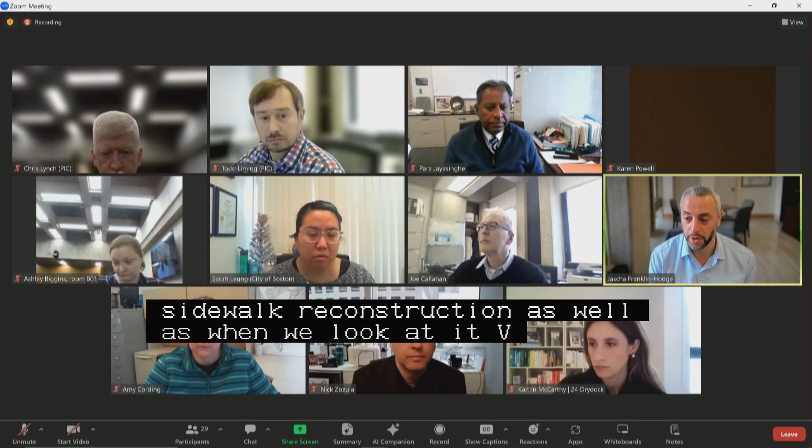So moved. On to public hearing continued number 2 on a petition by Atlantic Oliver Mass LLC for the making of specific repairs within the following public ways in Roxbury, consisting of curb realignment, sidewalk reconstruction, as well as new and relocated pedestrian ramps, street lighting infrastructure, landscaping, and driveway curb cuts. Massachusetts Avenue on its southwesterly side at address numbers 903 to 909, generally southeast of Island Street west of Massachusetts Avenue. New business on January 11th, public hearing on January 25th, as shown on a plan entitled City of Boston Public Works Department Engineering Division Specific Repair Plan, 909 Massachusetts Avenue and Island Street, Boston, Roxbury, one sheet dated January 17th, 2022, revised November 11th, 2023.

Would the petitioners please reintroduce themselves and let us know how you'd like to proceed on this action as well. Again, good morning, Mr. Chair, members of the commission, Attorney Nick Zozula, McDermott, Quilty, Miller and Hanley, 28 State Street in Boston, here on behalf of Atlantic Oliver Mass LLC, the petitioner. As for the first matter, we'd also like to request a continuance here until February 29th.

Do I hear a motion to continue public hearing continued number 2? I'll make a motion to continue public hearing continued number 2 as read into the record by the chair till February 29th. Second. All in favor? Aye. Aye. Any opposed or abstain?

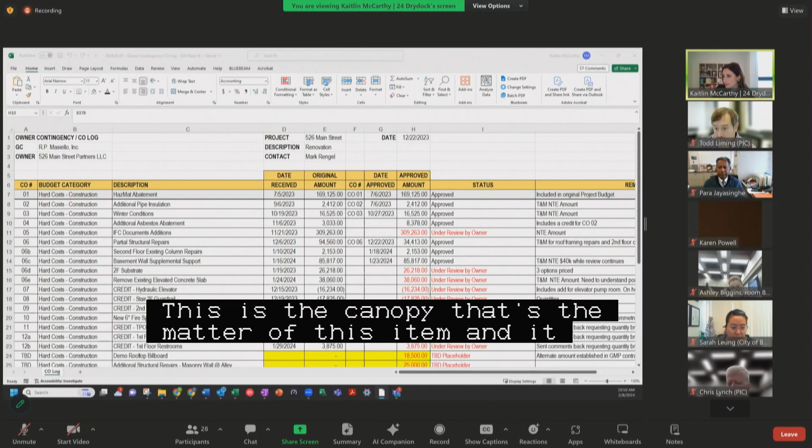And we have designed it in accordance with typical PIC regulations, which is that there's a 15-foot minimum vertical clearance, and it will extend 4.5 feet onto the sidewalk. Caitlin, apologies for interrupting, but we're seeing a spreadsheet on your screen, we're not seeing the plan rendering.

Thank you for flagging, sure. Is this the correct screen? There we go, that's a rendering. Perfect, thank you so much.

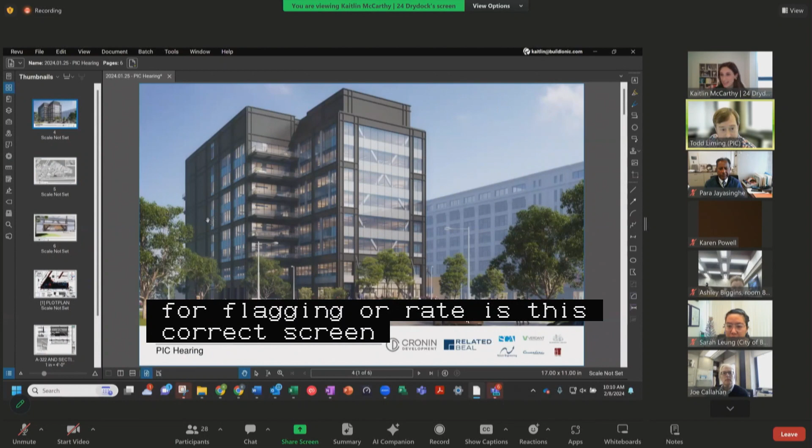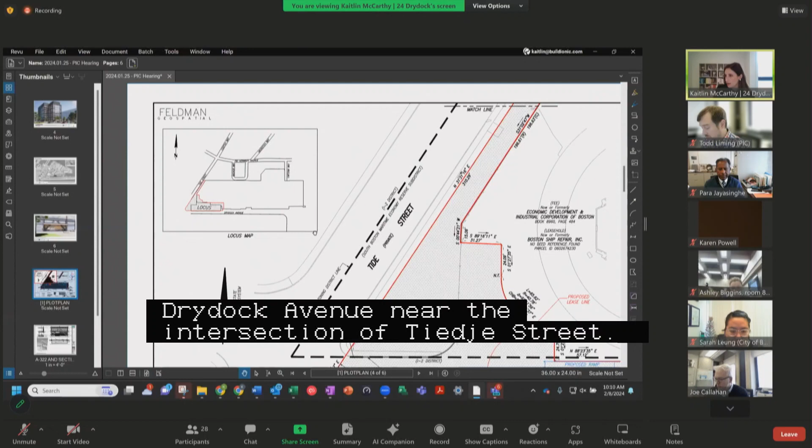So as I mentioned, 24 Drydock, this is going to be a 237,000 square foot life science building in the Ray L. Flynn Marine Park. It's right along Drydock Avenue near the intersection of Tide Street. The canopy that we're talking about today is this canopy that overhangs the sidewalk. As I mentioned, there's a minimum vertical clearance of 15 feet and a projection of 4.5 feet. There are also snow and ice mitigations built in to ensure that rain and snow are properly drained.

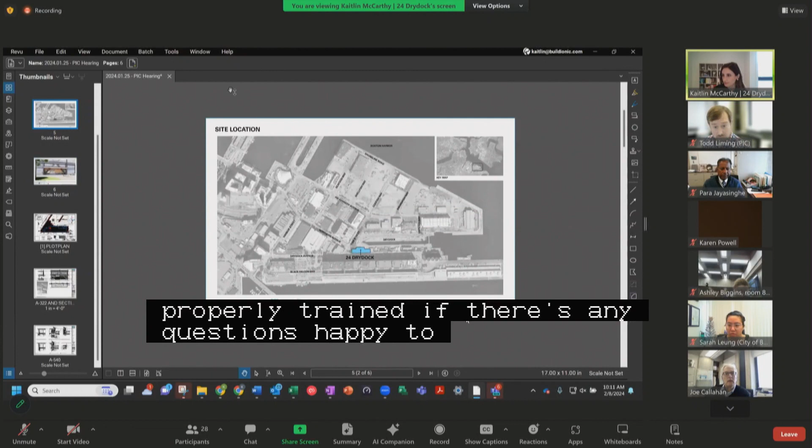If there's any questions, happy to answer them, but otherwise I'll turn that over back to the chair. Thank you very much for that. I guess my first question is, I know there was some discussion the last two times about the kind of review of any specific repairs, understanding that this is going to be turned over to the city at some point in the street. What was the conclusion of that discussion?

Mr. Chair, Matt Donovan from the Boston Planning and Development Agency. When you say specific repairs, do you mean the future improvements that are going to accompany the ground-up development at the site? Correct, yes, sorry, I was not very clear in that statement. Understanding that there will be additional changes to this street, which, were this to currently be a public way, would be under the purview of PIC, we had talked about making sure that those changes got some kind of review by the commission in anticipation of the street handover, and wanted to confirm if we had arrived at a conclusion about how that would happen and if everyone was in agreement on that.

Yes, I believe we are. I shared language with Todd. The proponent and I still have to work on the language and how it's going to read exactly, but conceptually I think we're all in agreement that before the issuance of an initial building permit, this same process will come through with whatever the improvement is. There are other examples that I'm sure will be forthcoming from other projects, and this is going to be the standard that we use for everything, so whether it was a projection license or streetscape improvements, it's going to be the same process. That language is going to live in the cooperation agreement so that we can monitor it through the project's development for this one, but similar language would go in depending on what the agreement were to be.

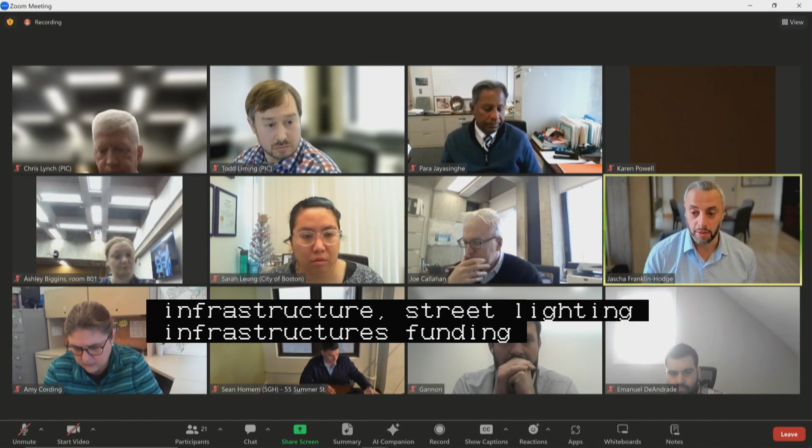Summer Street at address number 55, generally southeast of Chauncey Street, generally southwest of Summer Street, Kingston Street on its northwesterly side, generally between Summer Street and Bedford Street. New business on January 25th, as shown on a set of plans entitled City of Boston Public Works Department Engineering Division Specific Repair Plan, 55 Summer Street, Kingston Street, Summer Street, Chauncey Street, Boston, 5 sheets dated February 6, 2024.

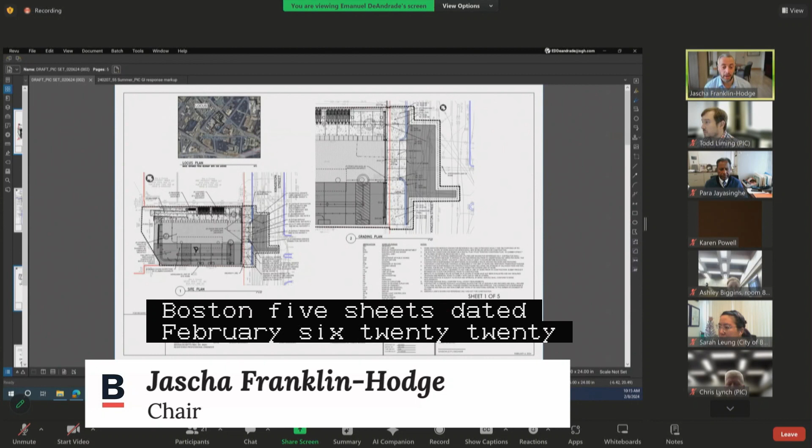Petitioners, please introduce themselves, their affiliations, give us a brief reintroduction to the project, and then walk us through anything that has changed since your last hearing. Great, thank you. Thank you for the time.

Sean Homem with Simpson, Gumpertz and Heger, engineer on the job. We also have Emanuel DeAndrade, who will be driving the screen today, also from SGH, and Gannon DePetris from Phase 3. Again, thank you for your time in reviewing this submission.

First off, I'll start by saying we had a series of several productive meetings with many folks that are on the call today. Just want to thank you all for your valuable input, feedback, and the cooperation with trying to work to achieve this goal here.

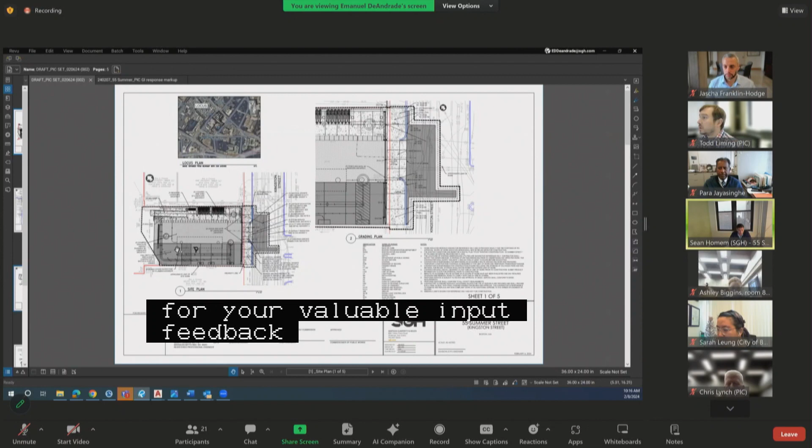This 55 Summer Street project is the general work is an interior renovation to convert the existing office building at 55 Summer Street to a mixed office and research development facility. As part of this, there was specific plaza and sidewalks on plazas on Chauncey and Summer Street and sidewalk on Kingston Street.

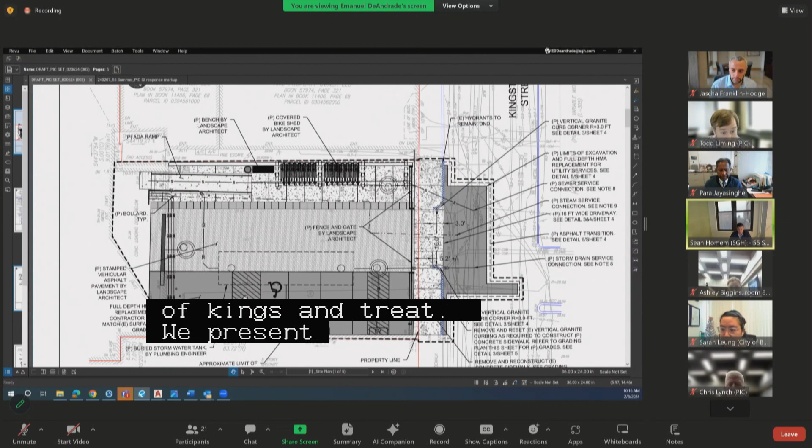We presented our scope during the last meeting, had several comments that I'll walk through the comments and then the proposed solutions that we arrived at in the last 2 weeks.

First off, we'll start on Kingston Street. This is the loading dock entrance ramp. The main comment here was to provide a minimum 5-foot walkway at the driveway entrance. We were able to modify the curb corner from a 6-foot radius curb corner to a 3-foot radius curb corner, and we're actually able to make that work. So right now we have a 5.2-foot minimum walking width on this pathway.

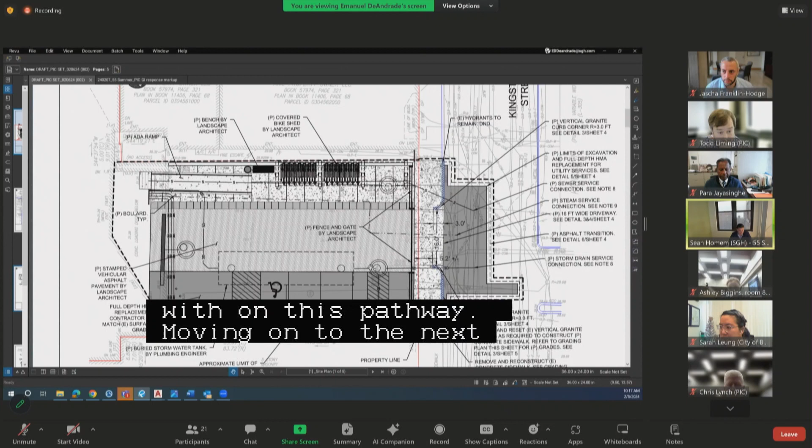Moving on to the next topic. Actually, maybe Chair, I don't know how you want to, would you like to keep this up for comment, or do you want to just proceed to the next area? We can move through all the changes and jump back to where we need to.

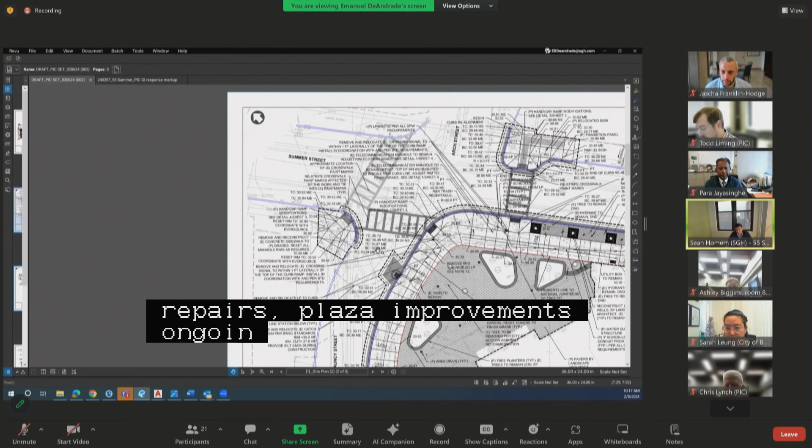Excellent. Thank you. Okay, now moving on to the Chauncey Street, Summer Street, Arch Street intersection. Here's where we have some plaza repairs, plaza improvements ongoing, some sidewalk repairs, as well as the addition of several handicap access ramps.

One of the main comments here was on the Macy's side, this corner opposite the subject property. The comment was whether or not this existing apex ramp was accessible or not.

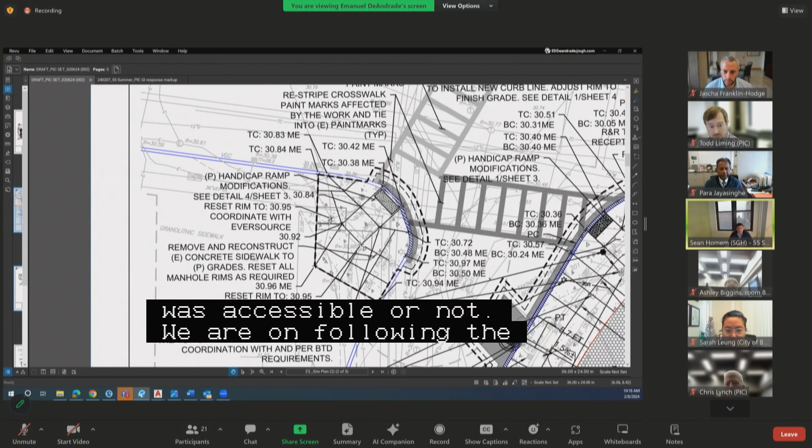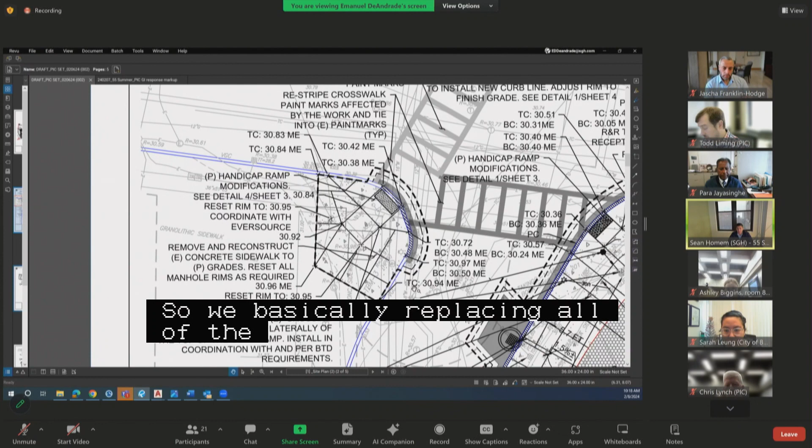Following the meeting, the day after, we went out to confirm the slopes of the ramps and landings, and found one landing was 0.5% off. We wanted to make it fully compliant, so here's the scope of work necessary. We're replacing all the concrete panels shown in dark black, as well as readjusting some of the vertical granite curb, since some of the slopes weren't compliant there.

We're adjusting that, and there's some coordination needed with Eversource. We have to lower a couple of their existing manholes in this area. We're going to coordinate with them, and it shouldn't be an issue once construction progresses.

Moving on to the Arch Street, Summer Street reciprocal ramp. On our side, we're calling to install a new accessible ramp here. The main comment initially was that the crosswalk was at a skew, so we made it perpendicular. We did so by extending the curb out into Summer Street and providing more of a landing so the slopes could work.

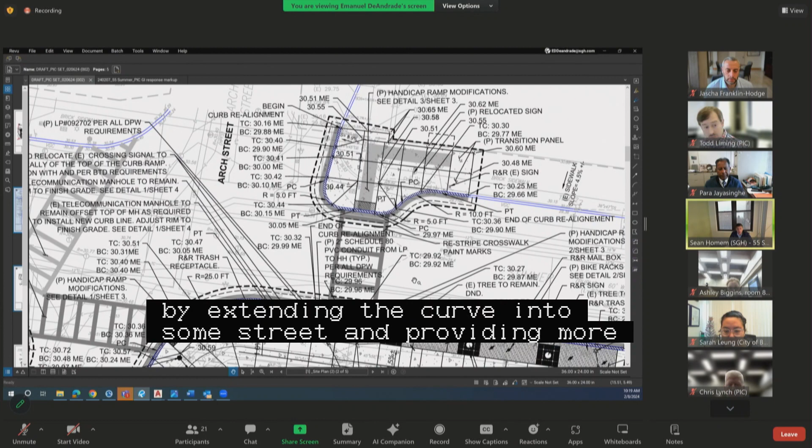So you can see it is now reciprocal and perpendicular to the proposed ramp on the subject property side. We have an accessible path that extends up the ramp close to the building, where it eventually meets the existing conditions.

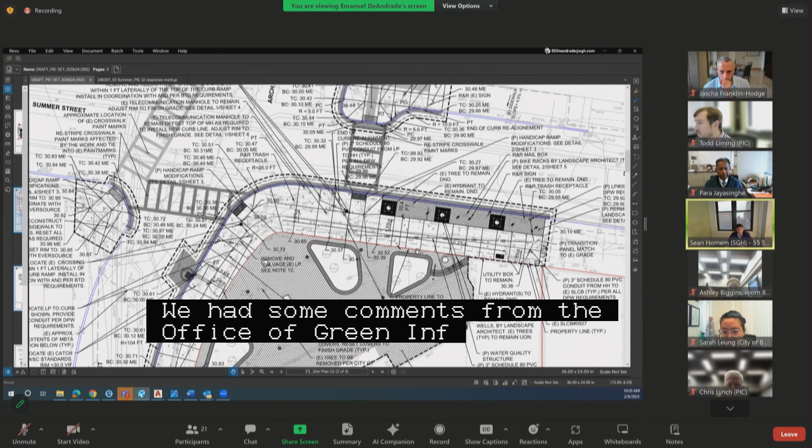Next on the agenda, we had some comments from the Office of Green Infrastructure, and we had a productive meeting with them yesterday and arrived at some conclusions. Originally we had it shown where the tree planters are as a permeable paver system, but we actually made a change to that. If you can pull up that plan here, we've changed that.

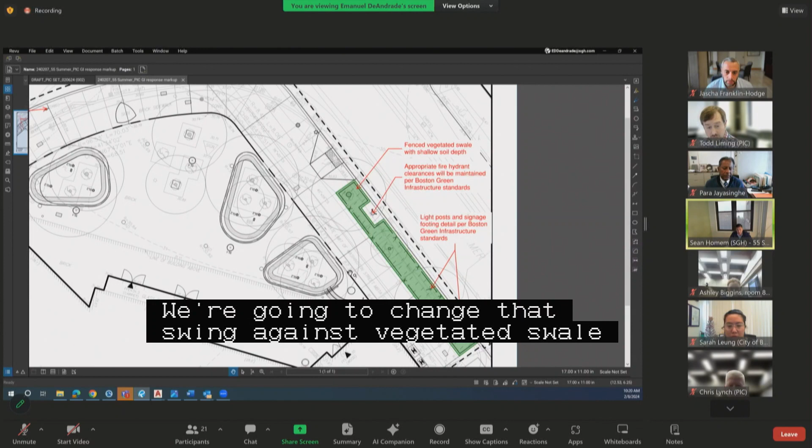We're not going to install the permeable pavers, but change that to a fenced vegetated swale. One thing we need to coordinate is the existing fire hydrant that we'd like to maintain, but we'll utilize some approved details for this type of condition. Rachel, from the Green Infrastructure Group, has sent us some details that we're going to coordinate and get fully compliant with their approved details.

We originally had some bike racks within the paver section, but we took those out and moved them over to the Chauncey Street side. We have three at the curb line at that corner, and then we pulled two close to the building, right at the corner of the building face there.

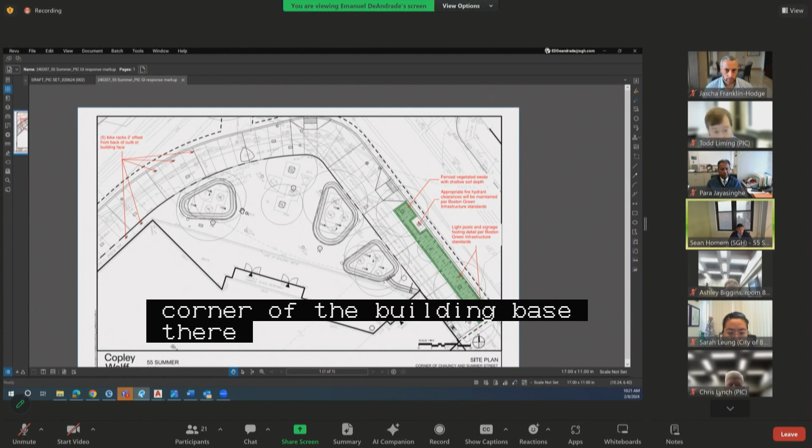At this corner, Green Infrastructure had suggested putting in some green infrastructure. We looked at this, and given the need for heavy pedestrian traffic that is and will be there as a result of the added bus stops, and the existing utility and MBTA infrastructure, we really found we couldn't fit more green infrastructure here at this corner.

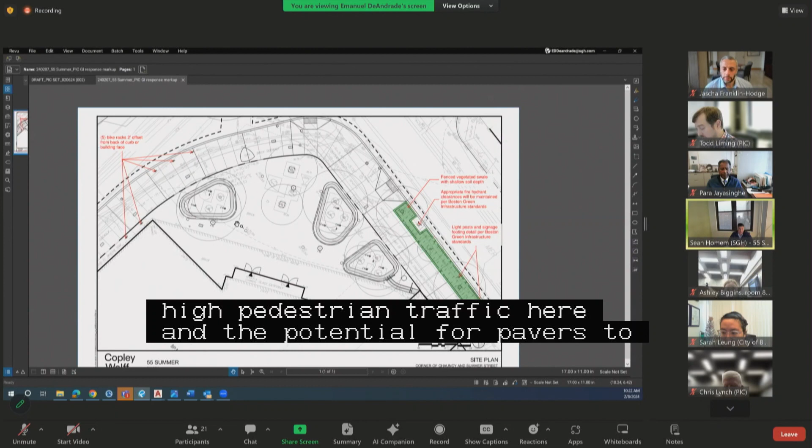We're exploring the option of putting in permeable pavers at the curb line again, but given the high pedestrian traffic here and the potential for pavers to become dislodged or become tripping hazards, we really wanted to create a solid concrete surface here to provide a means of egress.

With that, I think that is all the changes we've made. Hopefully we addressed all the comments you had. Open for any questions or comments you may have.

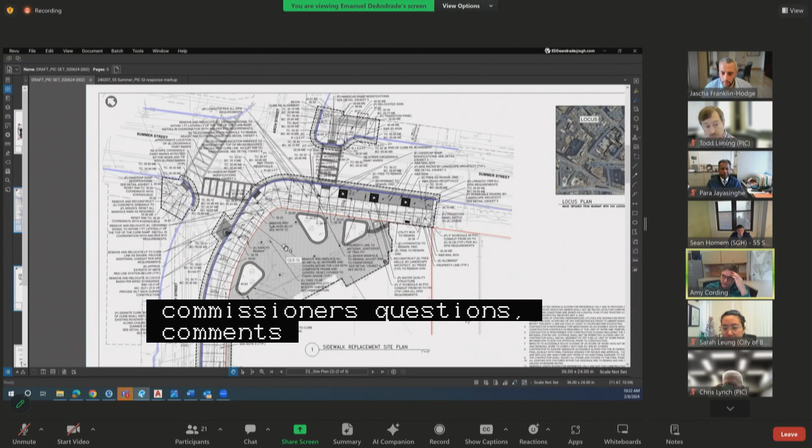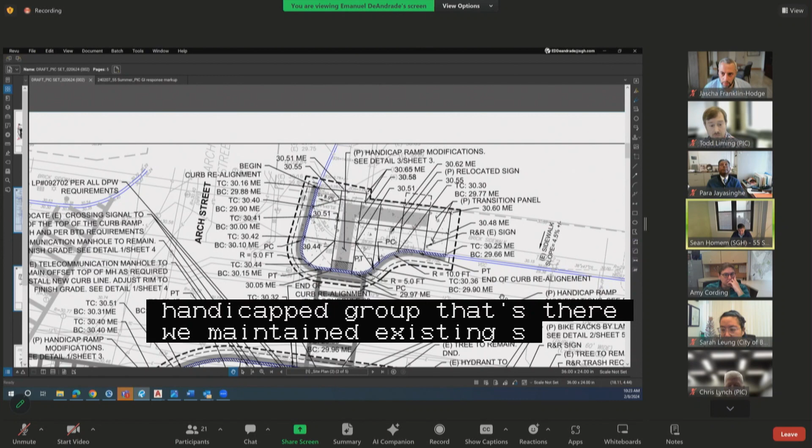Commissioners, questions, comments? The crosswalk at the top of the screen across Arch Street, what happens with that? So the scope of work, we stopped just prior to the existing handicap ramp that's there. We maintained the existing slopes of that ramp, and based on discussions with Sarah at that time, it was intended to leave that as is.

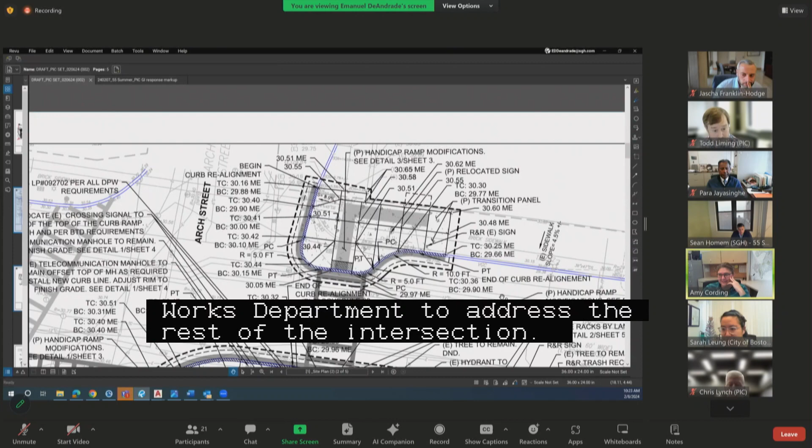Yeah, I just want to make sure the crosswalk was coming back. That's it. Yeah, the scope is going to stop prior to the existing crosswalk there, and I think that's where we're stopping ours. If that seemed to appear to be acceptable at that time.

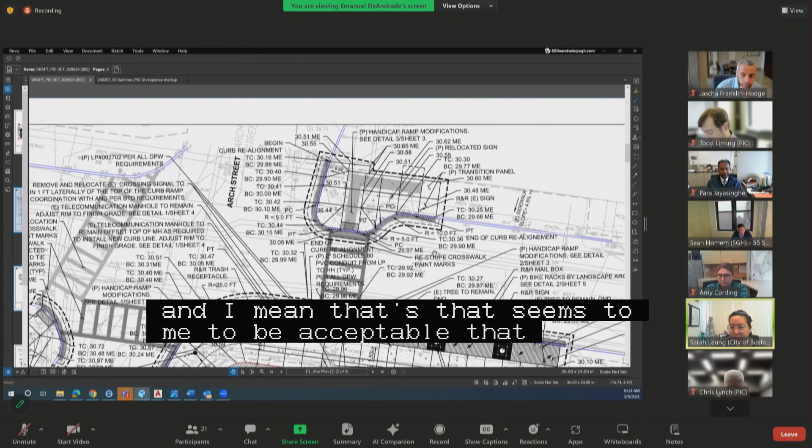So I do want to thank the team for getting these changes in fairly quickly. We certainly appreciate you guys taking our feedback. Yeah, thank you for taking the time to provide us the feedback, really.

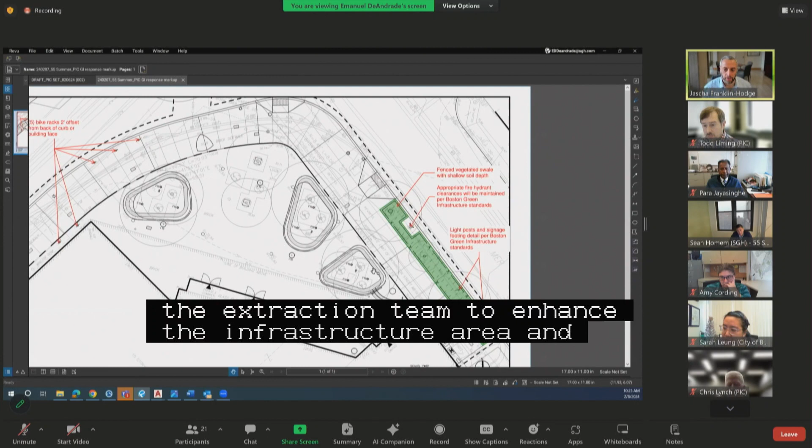Commissioners, questions, additional questions, comments? I have one related to the bioswale. Appreciate the work with the green infrastructure team to enhance the green infrastructure in the area, and I think it will be both good for stormwater and also an attractive feature in the area. However, I do want to confirm that you will be taking on maintenance responsibilities for that bioswale through your LMI. Is that correct? Correct. That will be documented in the LMI. Excellent. All right, great.

All right, seeing no other questions from the commission, PIC staff or members of the public? I just want to put on record that my understanding is the project will also be taking on maintenance of those 3 trees within that bioswale as part of the LMI. Confirmed. Great. No other comments or questions?

All right, with that, do I hear a motion to approve public hearing number 2? I'll make a motion to approve a petition by BP3 BOS 55 Summer Street LLC for the making of specific repairs in Summer Street, Chauncey Street, Kingston Street, as read into the record by the chair. Second. All in favor? Aye. Aye. Aye. Any opposed or abstain? So moved. Thank you very much. Thank you very much. Thank you.

All right, that concludes the public hearing section of our agenda. So on to new business, starting with new business number 1, Conley Street at 900 William T. Morrissey Boulevard, Dorchester, specific repairs on a petition by the Community Builders Incorporated, DBA Morrissey Boulevard 121A LP. The petitioners please introduce themselves, their affiliations, and walk us through what you are proposing to do.

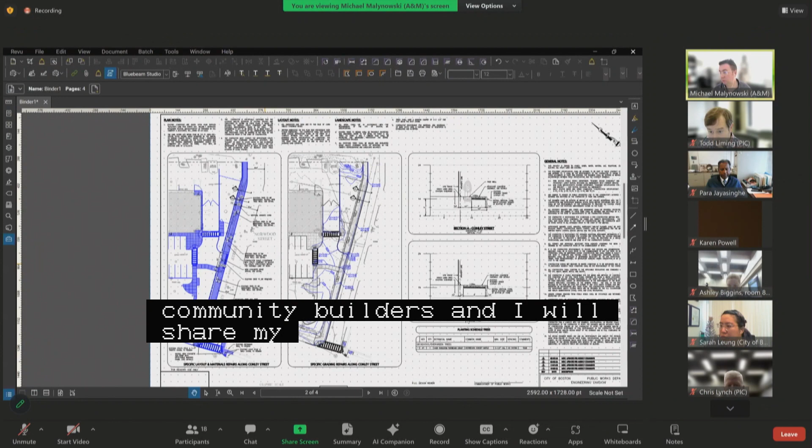Good morning, Mr. Chair, members of the board. My name is Michael Malynowski. I'm with Allen and Major Associates. With me, I have Echo and Suzanne from the Community Builders. And I will share my screen. Can everybody see? Yes. Okay. Our project is located at 900 Morrissey Boulevard.

The specific repairs that we are doing extend from the crosswalk at Morrissey Boulevard to the north to the existing overhead railroad bridge in this location. We are proposing to install an 8.5-foot wide sidewalk. Currently, there is no sidewalk on Conley Street.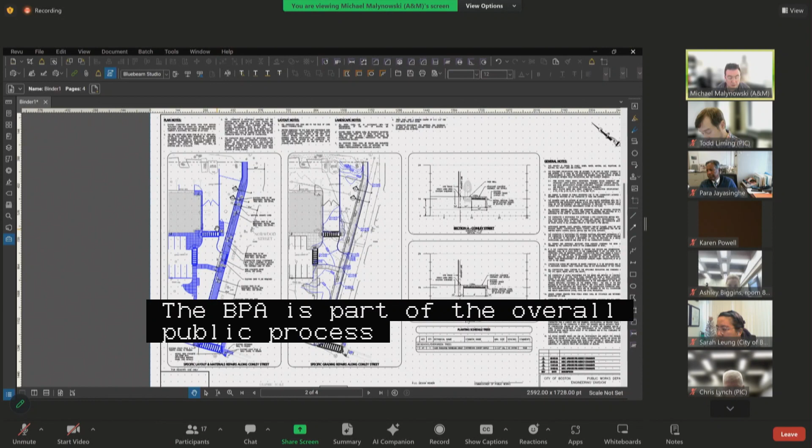The request has come through the BPDA as part of the overall permitting process for the project. The project is the conversion of the existing hotel that currently sits at that property. The community builders, in conjunction with the Pine Street Inn, plan to convert and renovate the existing hotel into 99 units of permanent supportive housing for seniors who've experienced chronic homelessness.

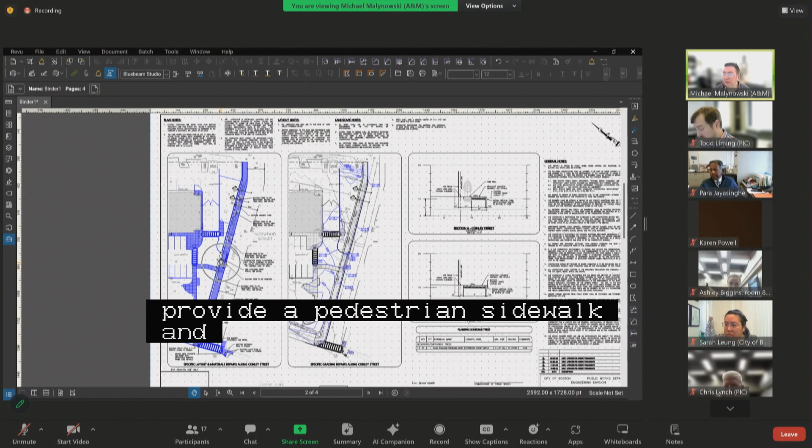Part of the proposal is to take out the vast expanse of parking within the property and provide landscaping. We are also proposing to realign the driveways. Currently, there is a driveway at this location that sort of circles around in front of the building. We plan to close that off, provide a pedestrian sidewalk, and reconstruct a fully compliant driveway entrance at this location. This will also provide better circulation through the front of the building and drop off for the main concourse.

As I zoom in, there are several trees that exist along Conley Street. We have one here, here, total of 3 that are being maintained. We are providing a 3-foot by 8-foot pit in that location. We have had some discussions with different departments relative to the sizing of the sidewalk, and we were able to extend the curb line along Conley Street out to provide a full 5-foot clear on the sidewalk as they pass in front of those trees.

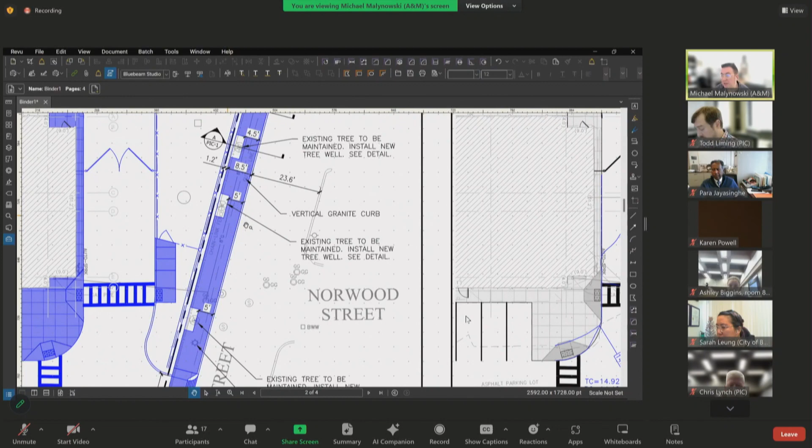We do have one additional tree that is going at this location to sort of mimic the tree pits that are existing along the roadway. Grading will be pretty much maintained along Conley Street. It sort of flows towards this property and then north and south to existing structures. The installation of the curb will not interfere with the proposed drainage in that area.

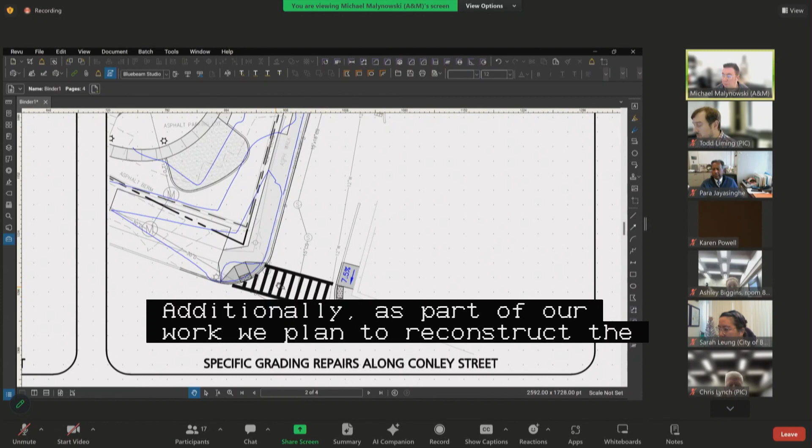Additionally, as part of our work, we plan to reconstruct the sidewalk ramps located at this location, as well as reconstructing the sidewalk and repainting the crosswalk. The work out on Morrissey Boulevard is dictated by the DCR. We do have current approvals for work out on the DCR property to close off the driveways that extend up onto Morrissey Boulevard. Be happy to answer any questions that the board may have. Thank you very much, commissioners.

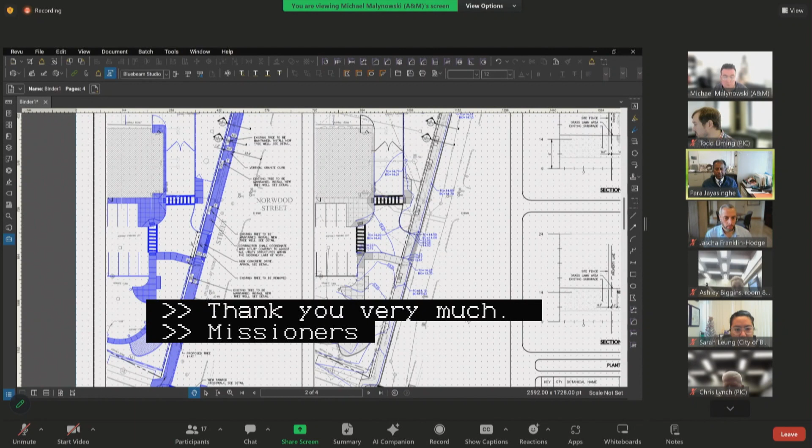Chief, your sidewalk treatments on Conley take it all the way to Morrissey Boulevard, correct? Yes, sir. It's those sections AA and BB that are closer, but you're carrying that detail all the way to Morrissey? Yes. Thank you, Michael.

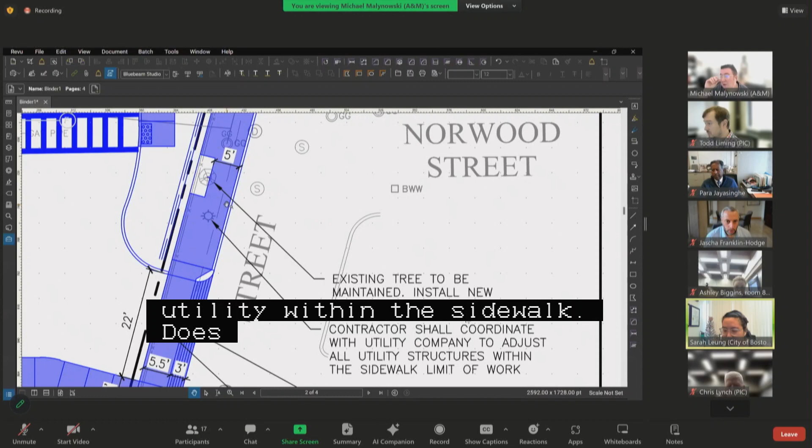Hi everyone, thank you so much for the presentation. I was wondering if you could provide a little more clarity on two points with the utility pole that exists on the street where it says the contractor shall coordinate with the utility company to adjust a utility within the sidewalk limit. Does that mean the pole is going to be relocated? We just want a bit more specificity on that, as well as the northernmost tree pit—it still looks like there's a 4.5 foot pinch point. Wondering if there's any possibility of gaining an extra half a foot there.

Thank you for that. The 4.5 foot is actually an error in the dimension. The dimension string doesn't pull to the face, so we do in fact have the full 5 feet at that location. We can adjust the dimension.

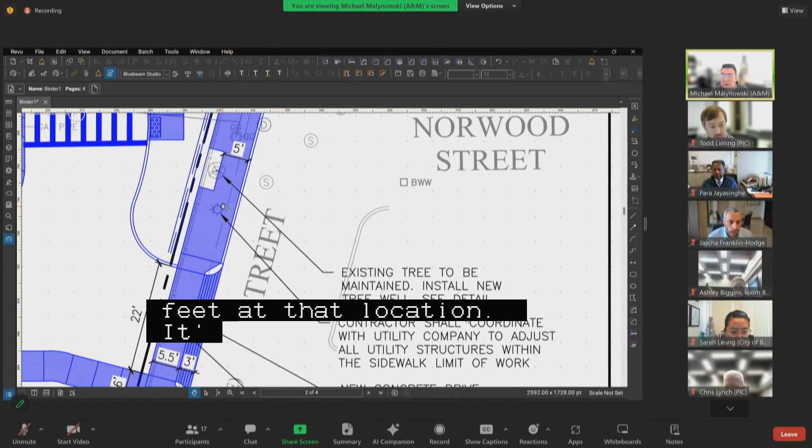Fantastic. Relative to the utility pole, it is to remain. There are a number of existing handholes and gas gates in the sidewalk that are in the pavement now. Those will need to be adjusted up so that they are flush with the proposed sidewalk.

What is the pinch point between the utility pole and the tree? Is this to scale? This is 20.

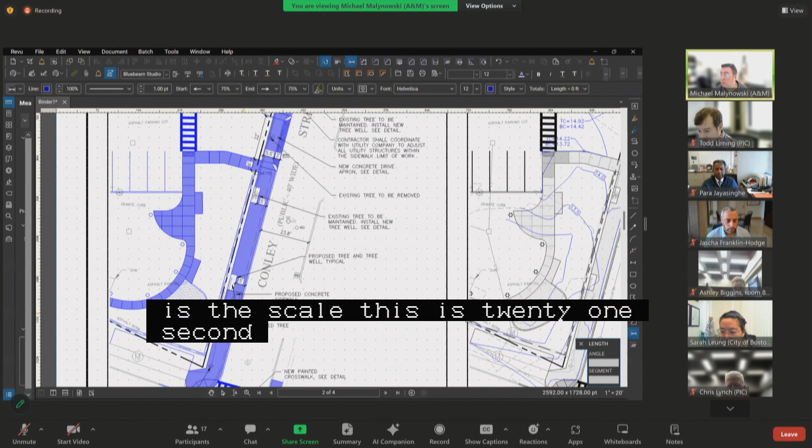Three feet, but that's the symbol. I will have to take a look—I think that symbol is much larger than what the utility pole actually is in that location.

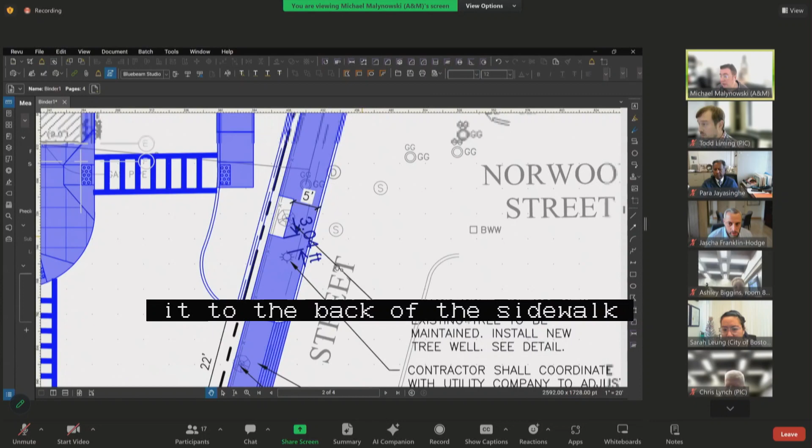Is there any way the city can help the proponent coordinate with the utility company to get it to the back of the sidewalk, just so folks aren't weaving in and out? We can ask, but if folks have been down there, the utility lines that run down the side of Conley are a mess of wires. There's a large amount of wires on those poles, so I'm not sure whether that can be pushed back, not to mention they're intertwined with the existing trees out there. That also doesn't sound like a safe situation, but we'll keep working it.

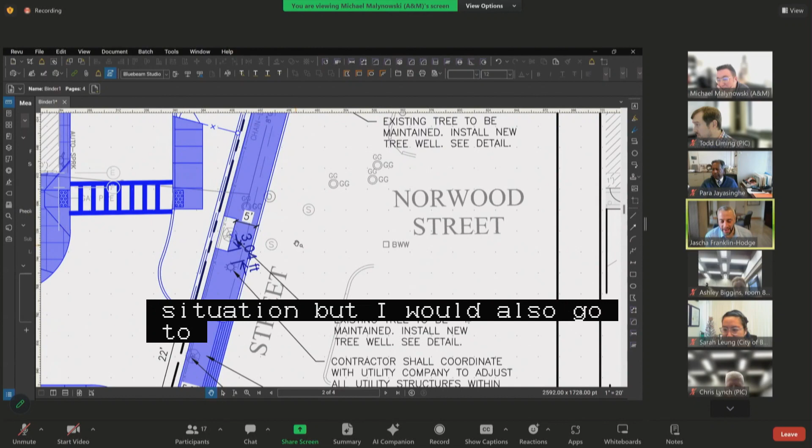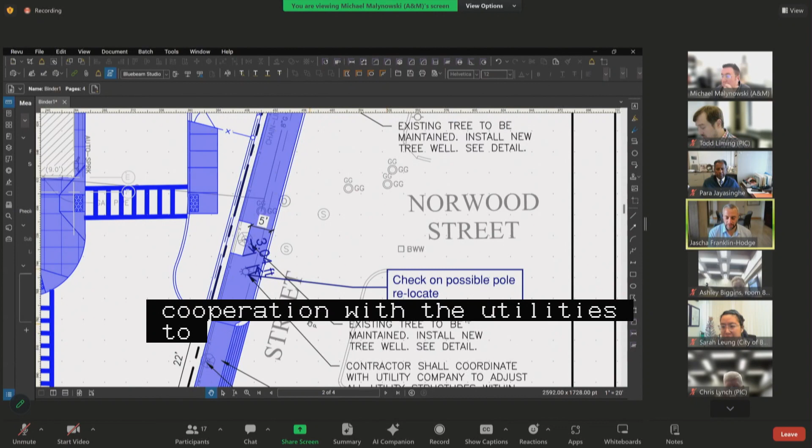I would also note that pole appears to be leaning or bent in some capacity. I think what we'd ask is that the proponents reach out to Verizon or Eversource or whoever owns that pole, and help us get a clearer read on what it would take to relocate it to the back of the sidewalk. We very much appreciate the creation of an accessible sidewalk in this area, but it would be a shame if that was marred by a utility pole that functionally made it inaccessible. We don't want to burden this important project with additional unnecessary expense, but my hope is that we can come to some resolution in cooperation with the utilities to ensure this gets moved in a way that supports accessibility and safety for the utilities as well.

We can also evaluate what the clear distance is around it. It's a little difficult to do with the symboling of the survey, so we can coordinate to make sure we have proper sizing of those utility structures shown on the plans and provide actual clearances. We may also be able to slide the tree pit a bit if we are close.

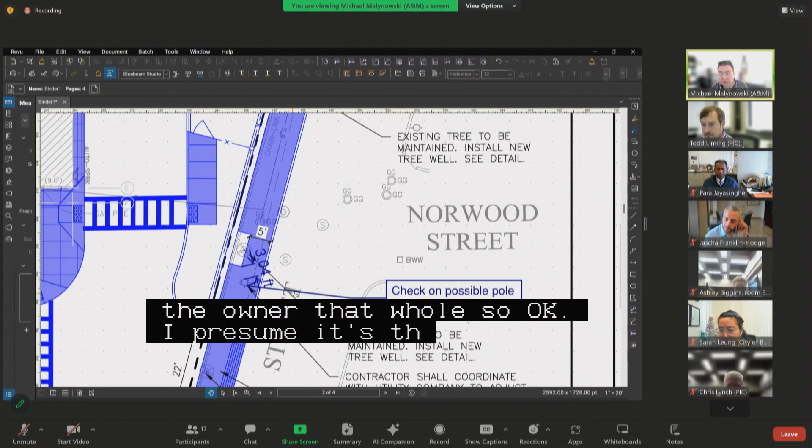Mike, we're happy to assist in getting you in touch with Verizon, who I believe is the owner of that pole. I presume it's the same folks we had initially reached out to during the PIC process, or is there somebody different? There'd be somebody different. I'll put you in touch with Karen Lebeck. All right, sounds good. Thank you very much, Todd. Sure.

Commissioners, other questions or comments? Hearing none, PIC staff or members of the public? All set? All right, thank you very much.

Will you be ready for your public hearing in 3 weeks on February 29th? Yes, we will, sir. Perfect. Thank you, we will see you then. Sounds good. Thank you. All right.

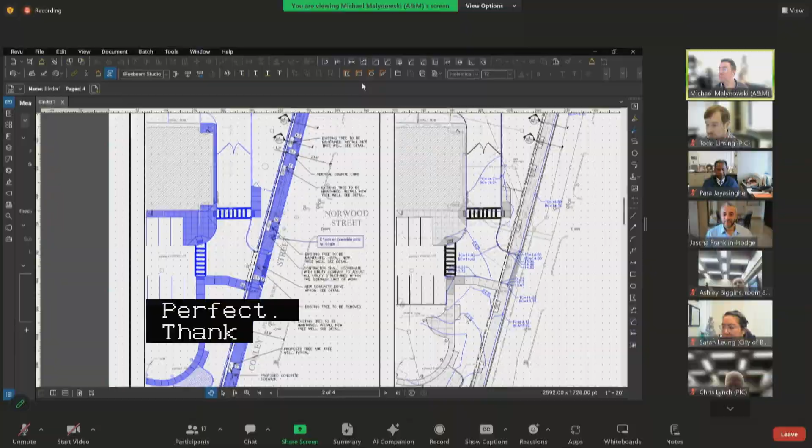On to our next item of business. New business number 2, 660 Tremont Street, Boston proper, grant of location on a petition by Verizon New England Incorporated. Would the petitioners please introduce themselves, their affiliations, and walk us through what is being proposed here?

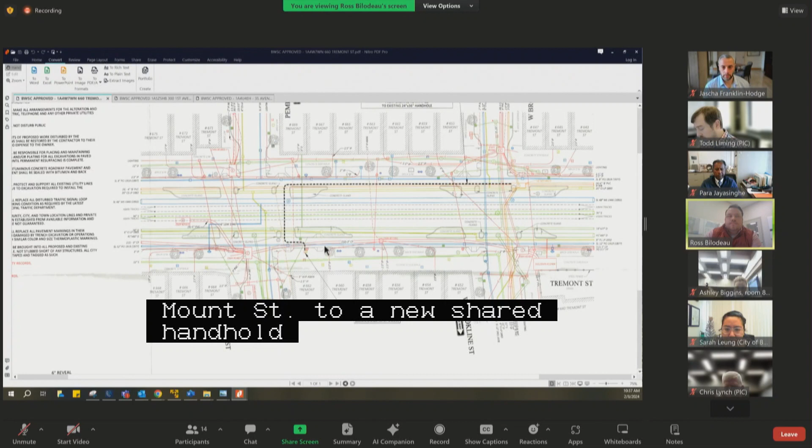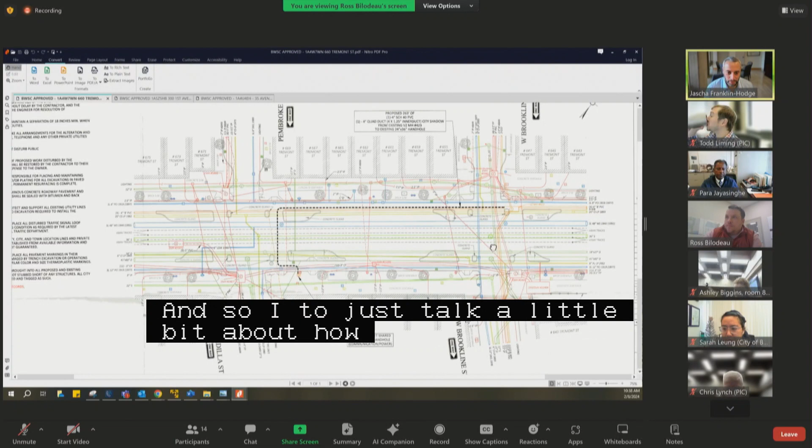Thank you, Ross. I'll note that this project cuts through an area the city has recently completed a major reconstruction of, at great difficulty and expense. I want to talk about how you're going to construct this without damaging or interfering with this brand new infrastructure, the bike lanes, concrete islands, and new crosswalks that this proposed route traverses. Can you say more about the route and your expectations for impacts and restoration associated with this project?

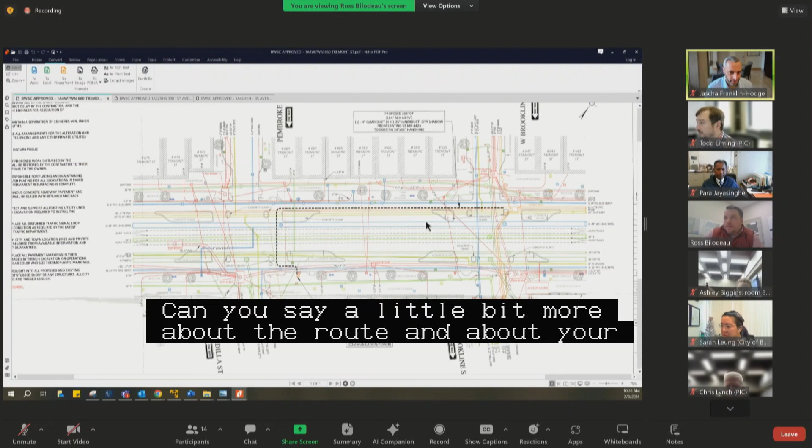Sure, understood. I know we'll have to restore it to how it's built now. I was not aware that this area was recently reconstructed, to be honest. I can certainly speak to that at the follow-up in two weeks.

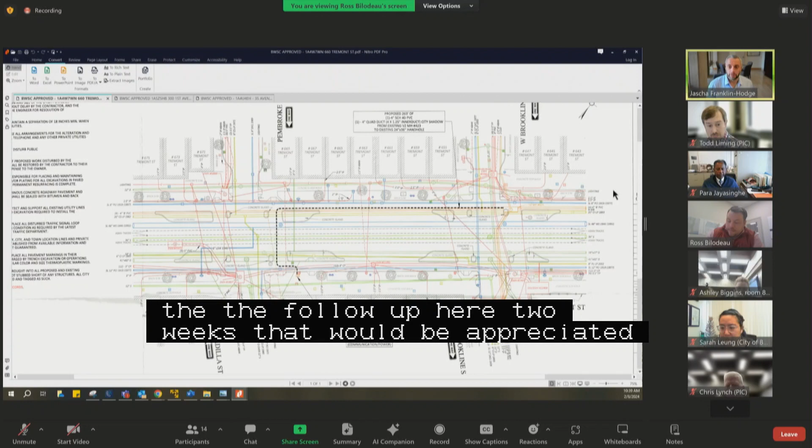That would be appreciated if you can dig into that with your construction team. A couple of specific asks: one, if you are trenching the bike lane, ensure you do a full curb-to-curb resurfacing of that bike lane and replace any markings that are interrupted.

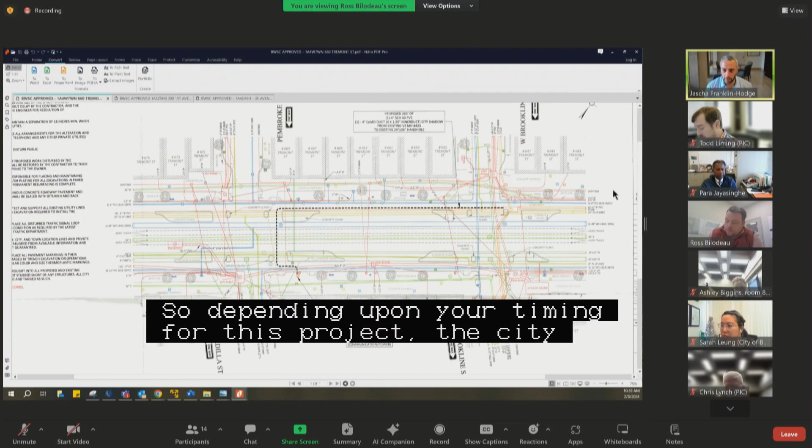Some marking work was not completed prior to the end of last construction season and will be completed in the spring. So depending on your timing for this project, the city would be happy to provide you with pavement and marking plans so you can restore it as intended by the final design. The condition today may be missing some markings that will be part of the final project, so that's something we'd want you to restore.

Request two: this appears to traverse very close to a number of constructed median islands, four on the north side of the street and one on the south side. We'd like confirmation on how you intend to do this trenching and what impacts, if any, you expect on those constructed islands. We want to make sure that if they're impacted in any way, they are fully restored in their intended configuration.

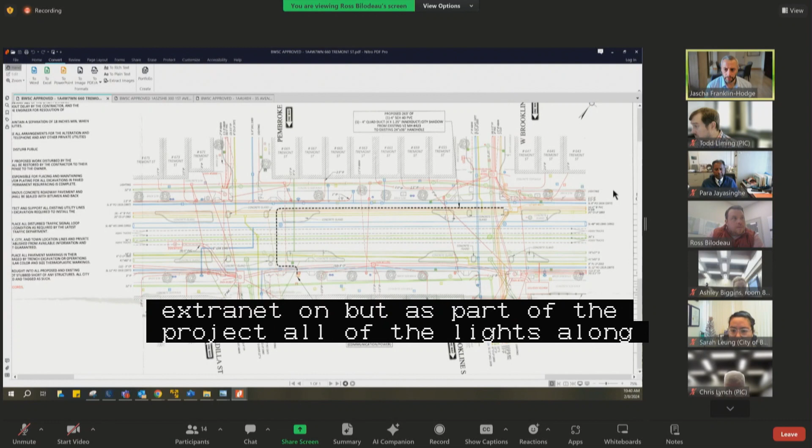And third, to confirm, maybe something we can follow up with Extenet on, but as part of the project all of the streetlights along this stretch of Tremont Street were replaced with a newer style of streetlight. We want to confirm that the final small cell pole installation will be consistent with the current street lighting design rather than the old design. I realize that's a bit of an Extenet thing, but since you're here, if you can reach out to them and confirm that too, that would be appreciated. Those are my specific requests related to the impacts of this project.

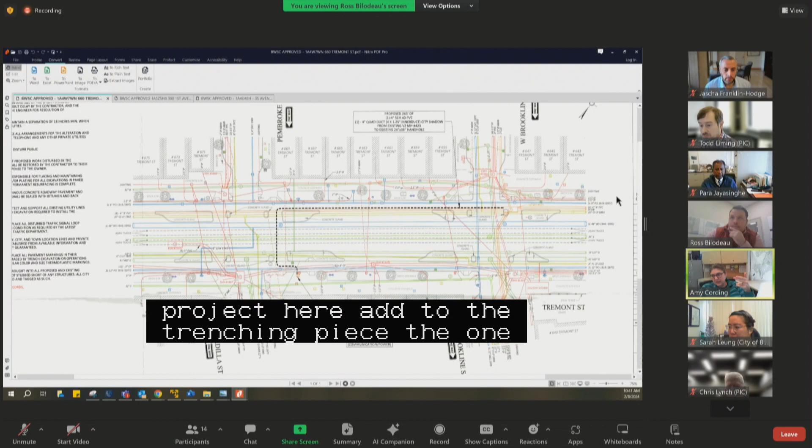To add to the trenching piece, the section behind the islands should be resurfaced between those two curbs so there's not a trench where people want to ride. Yes, exactly.

This project was a bear, so we're very sensitive to it getting torn up.

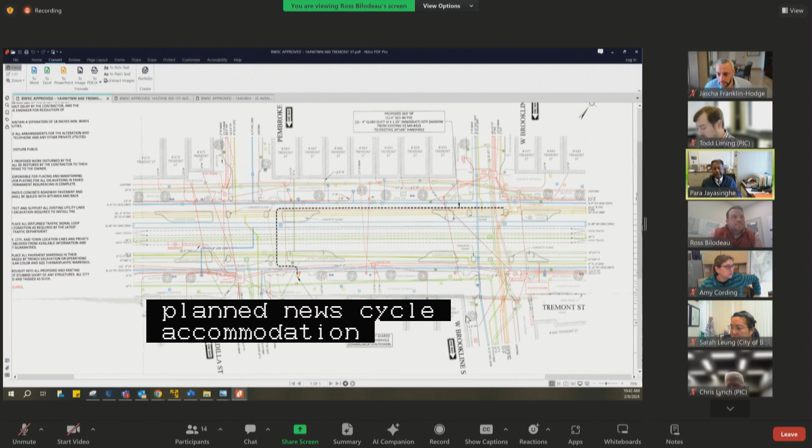Commissioners, other questions, comments? Ross, in addition to what was articulated by the chair, keep in mind this is a brand new cycle accommodation, a cycle pathway. Be sensitive to construction defects across all the time periods between your digging, patching, and near final restoration. The experience of a cyclist is far more profound and consequential than if this cut were on the roadway under a car's tires. We want your contractor to take extra caution to maintain the functionality of that surface from the day you cut it until you put it back the way it needs to be, so that in the time period in between, a cyclist shouldn't have to experience something less than what the city had given them.

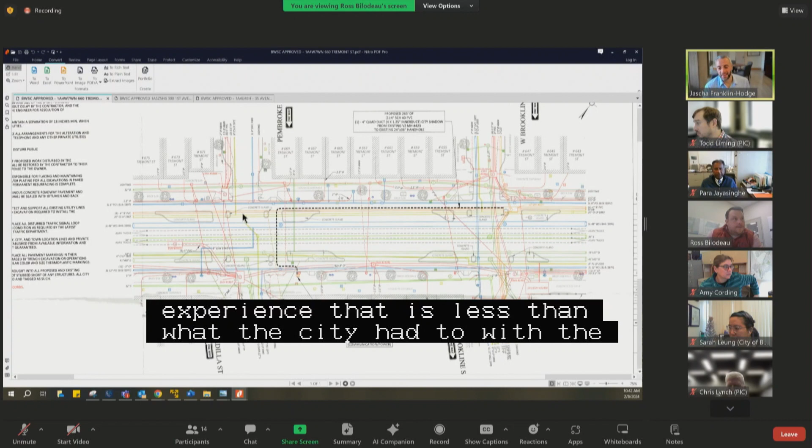Okay, I'm going to add one additional thing that Para reminded me of. Because of the nature of this design where you have bikes stuck behind parked cars and constructed islands, detours out of a bike facility like this can be very tricky if they are not thoughtfully planned. Sometimes we see someone just putting a block across the bike lane, forcing bikes to thread their way through parked cars into an active travel lane.

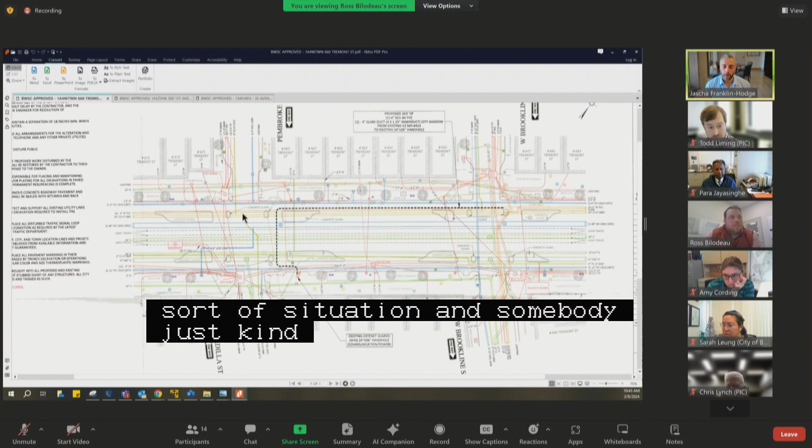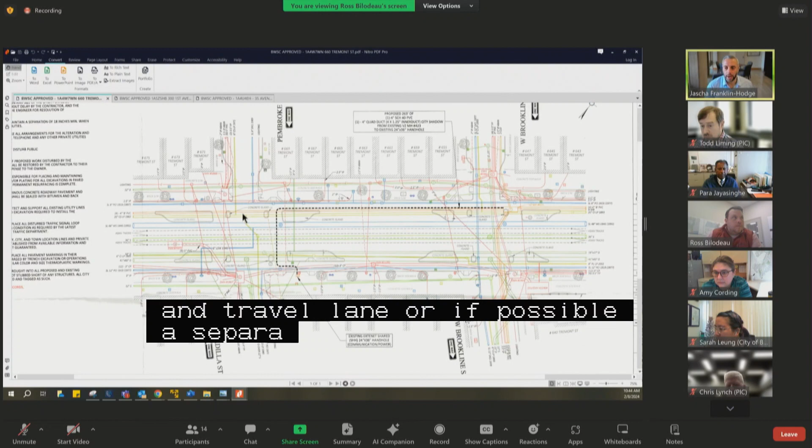So as you are developing your management plan for this project, please make sure your engineering team gives thoughtful attention to how to create safe bike detours for someone approaching the construction site. If the lane is blocked, they should either detour into the vehicular travel lane, or if possible, into a separated bike lane, maybe taking some parking during construction. We just want to make sure people aren't put in an unsafe situation, so please make sure that's incorporated into your plan.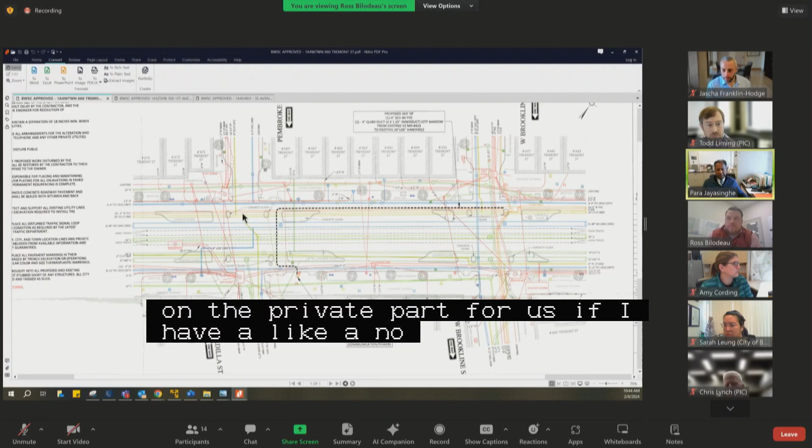Can the run just be moved to the road? Exactly, put it onto the south side of the street, right above that drain, completely on the opposite side of the travel path. Ross, if I have a no-fly zone for the bike path, sort it out. Move your long run on Tremont Street to the bottom part of the plans.

The other thing that might give you a benefit - I don't know if you've consulted with parks yet on the street trees - but you may be in the root zone of those trees in the current path, and putting it in the street might help you avoid any impacts on street trees.

All right, commissioners, any final comments, questions? PAC staff, members of the public?

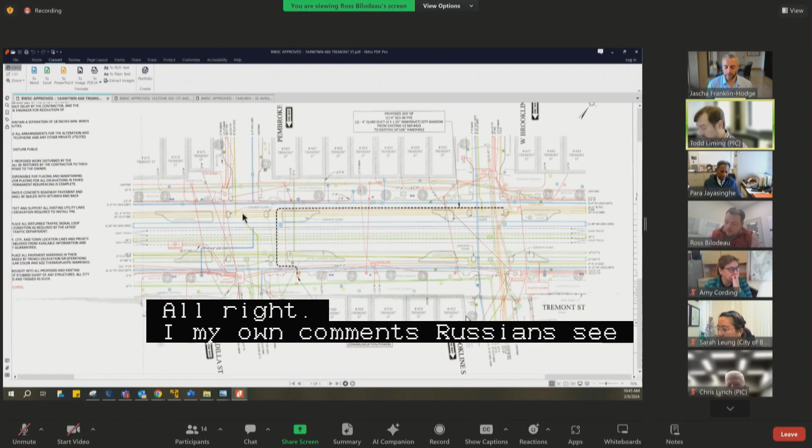All set here. All right, will you be ready for your public hearing in 3 weeks on February 29th? I certainly hope so, yeah, I'll be ready. I'll have to represent this as you guys have dictated here, this path to the south side. Appreciate the work on this one. Thank you, we'll see you in 3 weeks on this one.

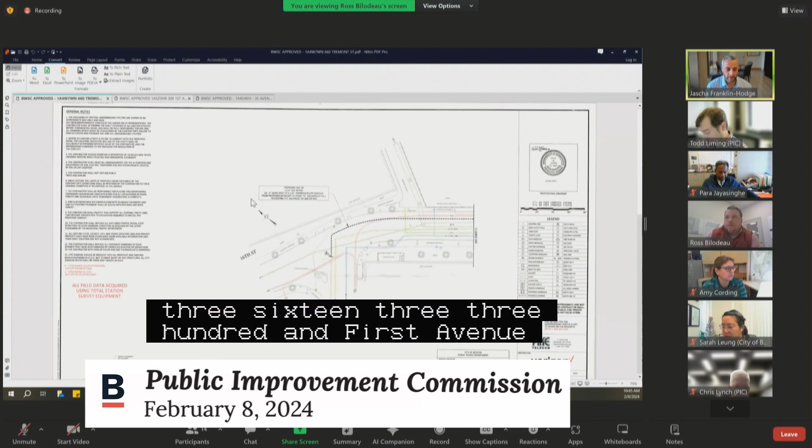On to new business number 3, 16th Street at 300 First Avenue, Charlestown, grant of location, and a petition by Verizon New England Incorporated. Would the petitioners please reintroduce themselves and give us an overview of what is proposed here?

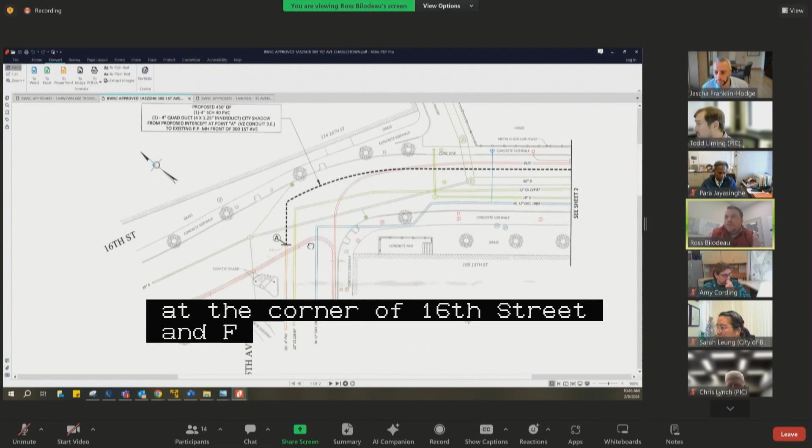Good morning again, Ross Bilodeau representing Verizon New England. Verizon is looking to place one 4-inch Schedule 40 PVC pipe from existing stubs at our point A, as shown on plan at the corner of 16th Street and 5th Ave, running to our second sheet here to a customer-placed handhole on the property line for 300 First Ave. This is to serve the 300 First Ave building.

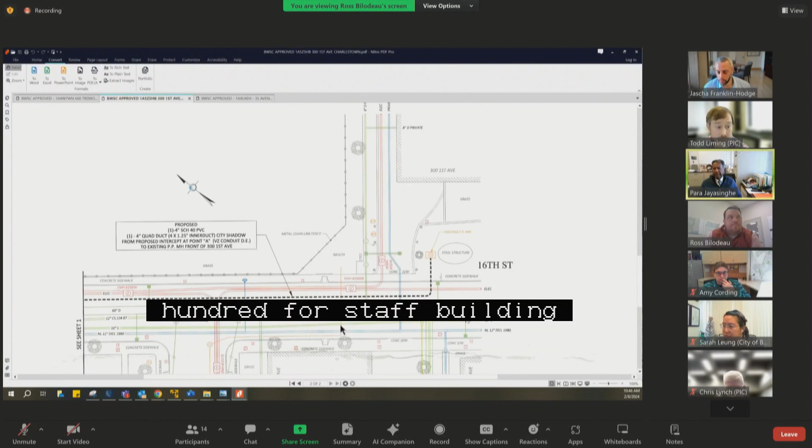Commissioners, questions? Ross, is that building the Spaulding Rehab Center? I'm not sure, to be honest, off the top of my head. Yeah Ross, again, check it out because the surface treatments on First Ave may be different - I can't quite make it out. There were extraordinary understandings between the city and the Spaulding Rehab Center when that got built up.

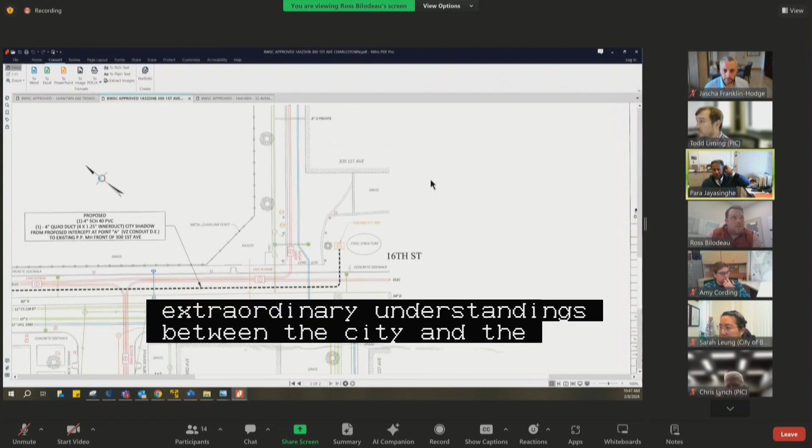And I'm a little bit baffled as to the need for it, because I thought we cleared all the utility needs and telecom needs and all of that. So just go take a look at it, because it's very new - not yesterday new, but there was a significant investment in all parties' resources in this area, and chopping up First Ave might be fun, might not be fun.

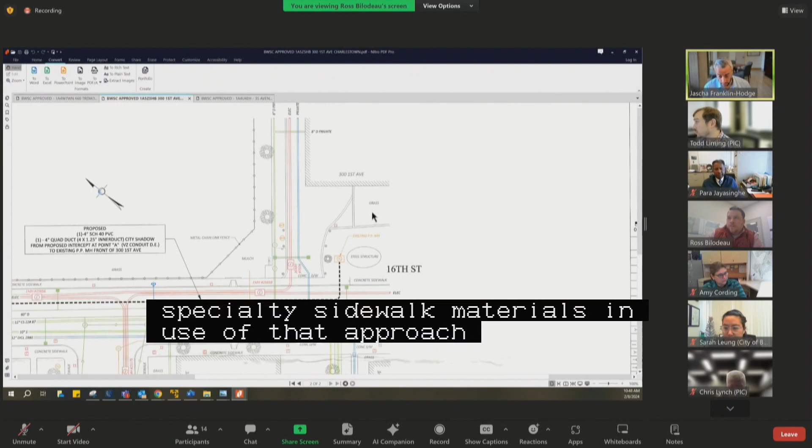Understood. To Para's point, there also appears to be some specialty sidewalk materials in use right at that approach to what's marked as steel structure, so making sure those are restored appropriately will be part of that. Additionally, this is right outside Spaulding Rehab Center, so being mindful of construction detours and ensuring their accessibility is especially important in this location.

All right, PIC staff, members of the public? For the record, I believe this is indeed servicing Spaulding Rehab Center, and I will say we do have an LM&I agreement with Spaulding Rehab for all of the specialty improvements within 16th Street, so hopefully that's a non-issue. Great.

All right, hearing no other questions, will you be ready for your public hearing in 3 weeks on February 29th? Yes, I will be there. All right, let's see you then.

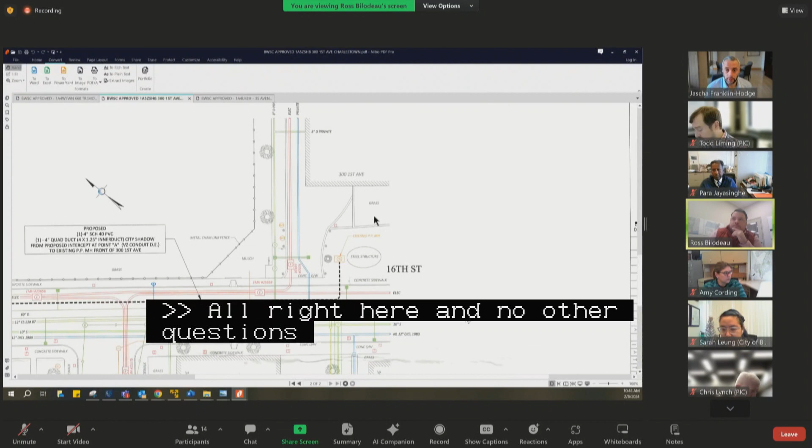On to new business number 4, 35 Avenue Louis Pasteur, Roxbury, granted location on a petition by Verizon New England Incorporated. Would the petitioners please introduce themselves and their affiliations and give us an overview of what you are proposing to do here?

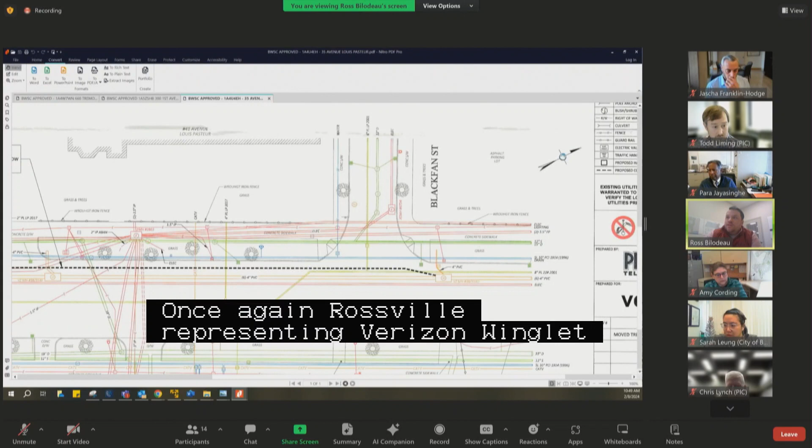Yes, once again, Ross Bilodeau representing Verizon New England. Verizon is looking to place one new 4-inch conduit with city shadow from our existing manhole 354D located on Louis Pasteur at the corner of Blackfan Street. This is to be run to a shared handhole with Extenet, again to provide services to this area for a small cell site.

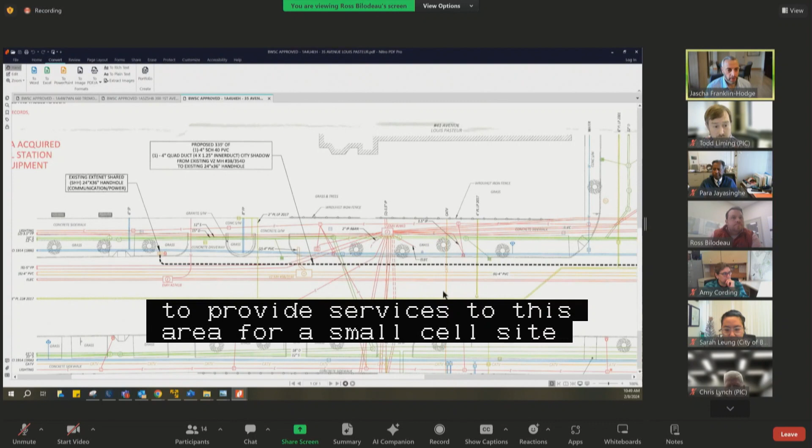Commissioners, questions? All right, hearing none, PIC staff or members of the public? I think we're all set on this.

All right, excellent. Will you be ready for your public hearing in 3 weeks? Yes, I will be. Thank you. All right, we'll see you on February 29th. Thank you, Ross. All right, thanks.

And on to our last item of business, new business number 5, Senator Bolling Circle, Snowden Way, Mattapan roadway betterments, and a set of petitions by the abutters. Public hearing to be scheduled for Monday, March 4th, 2024 at the Perkins Community Center, 155 Talbot Avenue, Dorchester at 6 p.m. Would the petitioners please introduce themselves, or is this no?

This is a matter. This is a PIC matter. So Todd, go ahead, take it away. Sure. This is a set of roadway betterments.

These are existing private ways, and the abutters have petitioned the PIC to consider upgrading them to be public ways. We've had countless meetings with the abutters as well as a number of elected officials. We've explained the process and how all of this works. We have the public hearing scheduled for March 4th in the evening out in the community. During that time, we will hold a vote by the abutters. They've all received their assessment letters, and they will get to choose whether these streets will remain private or go public. And if they do go public, the city will reconstruct them to conform to current public way standards.

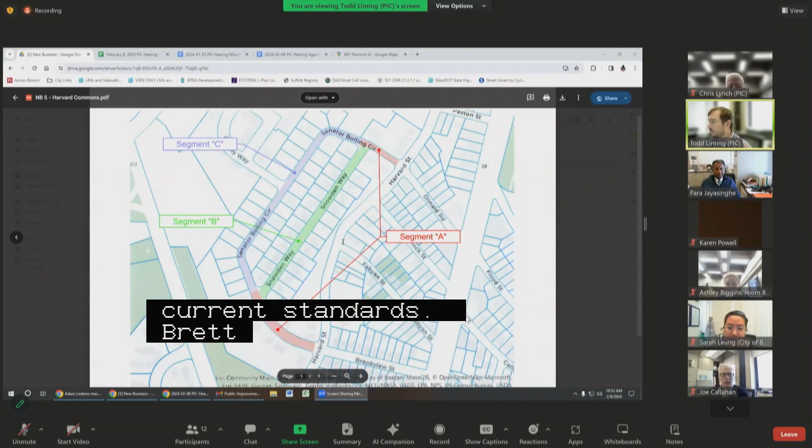Correct. And just for a little context, here you go. These are the streets off of Harvard Street in the Mattapan neighborhood. All of those were laid out as private ways open to public travel at the petition of the developer some years back. Okay. Yep. And we are still looking to secure 1 or 2 final commission members to attend that hearing on March 4th at Perkins Community Center.

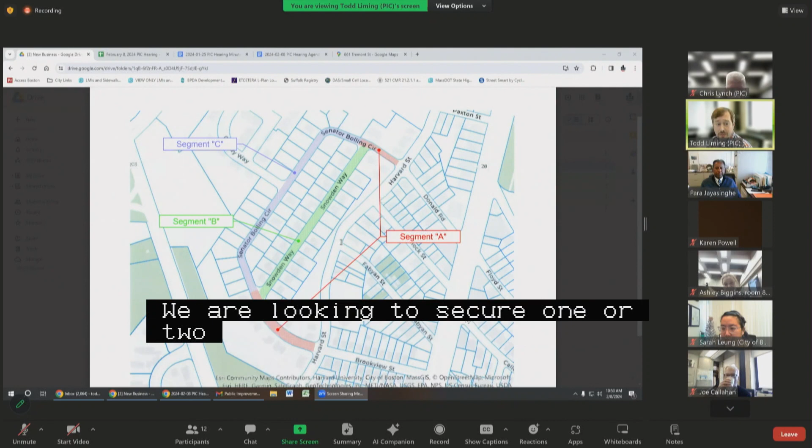So if you haven't heard from me already, you will very soon. Just as prior practice, we need a minimum quorum to open a public hearing. The full commission doesn't need to be there, but a minimum. Correct.

Okay. Great. Looking forward to that hearing. So seeing no other people on the call who are not members of the commission or staff, I don't think there's any further comment needed on this, but we will move ahead with that as scheduled.